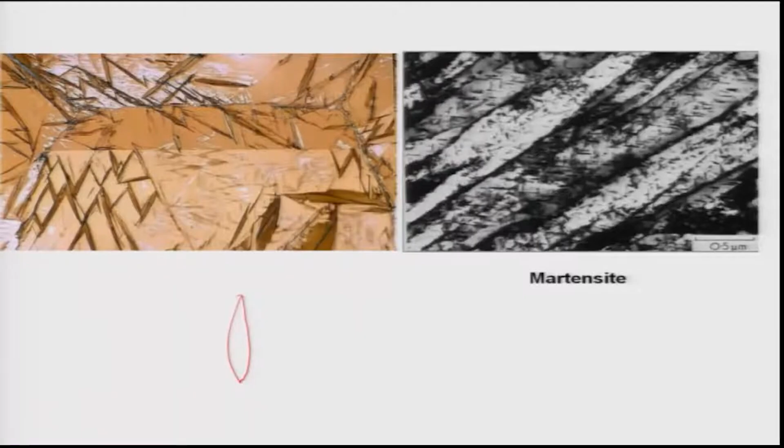That is what I have shown you earlier also, and they are faulted, and basically faults lie both inside the plates as well as on the surfaces, that is, along the plane between the austenite and the martensite. But mostly internal faults are more predominant in the microstructure. That is what I have shown you. Internal faults like twins are very predominant in the martensitic plates.

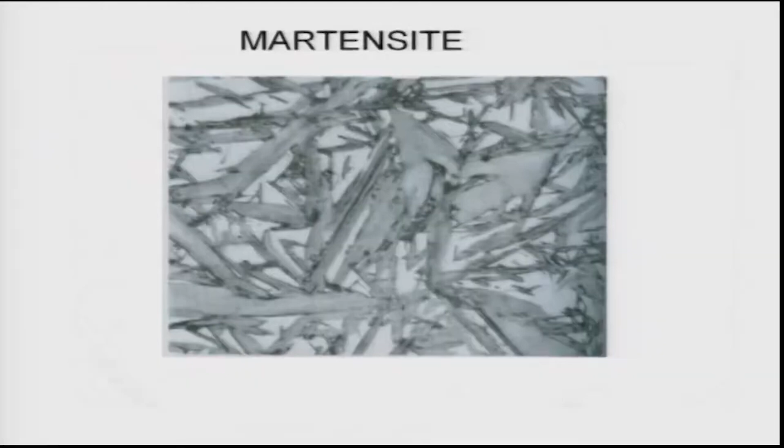Now, these things can be easily discussed using a nice analogy, and that analogy is in the book of Professor A.K. Jena and Professor M.C. Chaturvedi, and I am taking the example directly from this book. As you clearly see, before the transformation to martensite, some scratches were made on the surface, and then the steel was heated to high temperature and quenched in water.

So obviously martensitic plates will form on the surface, and this normally creates surface relief. That means the distorted plane comes out from the surface and creates a surface relief. That is what is seen there. You can see there is a distorted region along these lines. Let me just show it. Okay. So this is the distorted plane, as you see here, along these directions.

Now one can actually look at the scratch. The scratches were moving on the plane of the parent phase austenite, then they get bent on the martensitic plates, then subsequently they again remain flat on the surface. So we can represent this whole situation in a schematic manner. That is what I am showing here, like distorted plates.

MNOP is the undistorted plane of the austenite before the transformation, and EFGHIJKL is basically the distorted martensitic plate. As you clearly see, the scratches were moving on the flat MNOP surface, then they get bent along BC, and then again moved out from these distorted martensitic plates.

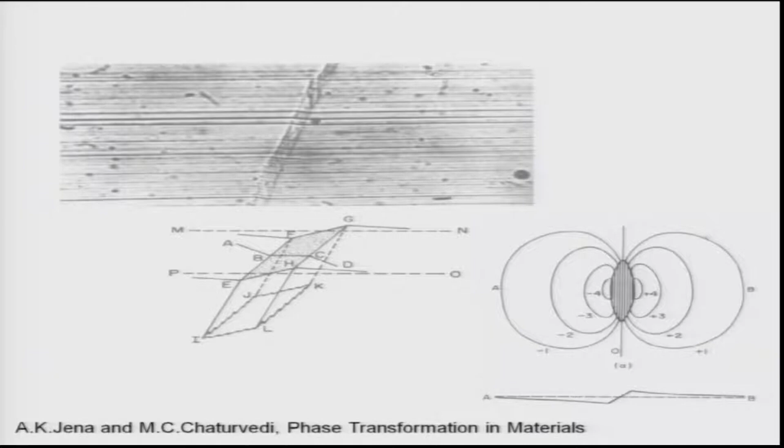So, the direction of the movement of the atoms is even seen there also. If you look at the orientation of the plane E, F, G, H, that is bent in the direction same as the distortion of the crystal. So, that always happens, that means the distorted plane remains a plane, and the distorted direction remains a direction in the parent austenite crystal as well as the martensitic crystal; they do not get changed. So, that is only possible when they keep the orientation relationship constant without distorting much.

So, what actually happens is shown in the next picture which I have shown you earlier. If I have continuous FCC austenite unit cells sitting atomically, where these open circles correspond to iron atoms and the closed black circles correspond to carbon atoms, we can actually constitute a BCT unit cell out of the two FCC unit cells, just like the way it is shown in this picture, and the one which is taken out from the construction is shown here in picture B.

You see the c/a ratio is actually close to 1.04, that is a very small distortion or very small increase of c as compared to the BCC unit cell of the corresponding alpha phase. So, these distortions which are happening can again be represented in terms of atoms. Here the open circles are iron atoms sitting on the plane, and the dotted open circles are sitting below the plane, and the carbon atoms are shown as black or closed circles.

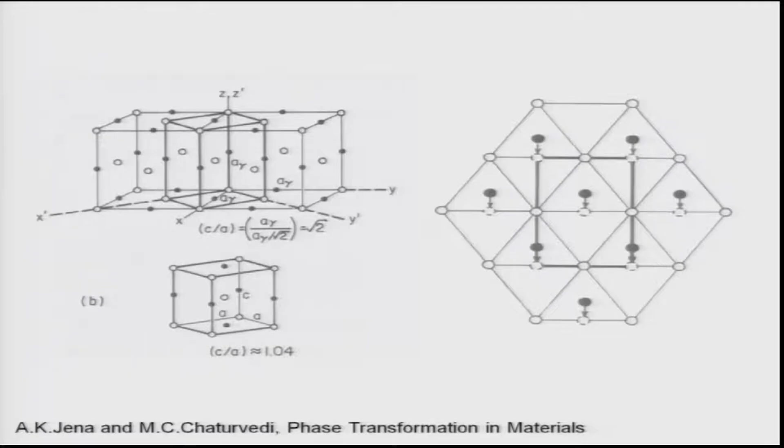As you see here, the carbon atoms actually move from these positions to these positions very easily. So the whole distortion requires vertical movement of the carbon atoms. These carbon atoms actually move vertically simply by application of the shear force in this way, and they cause the distortion in the martensitic plates. So that is basically the idea.

Now if you do this kind of distortion, you generate a lot of strain, and this strain can only be accommodated by creating twins. That also can be seen in the simple picture. Suppose I take a simple undistorted lattice, shown as A, and then start giving a shear strain. One part of the crystal has become bent with respect to the other, and if you want to create invariant planes which will remain invariant with respect to the matrix, then what is required is to give a slight distortion like that.

You see, this is a slight plastic distortion given, so atomic planes do get moved, and subsequently these planes will be arranged energetically favorably like that, and this will lead to twin formation. That is very evident in picture from C, D, E.

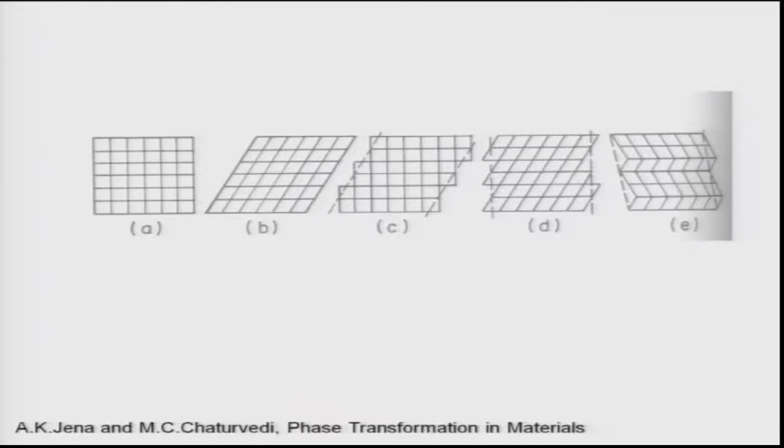So thus twins in the martensitic plates are actually because of this heavy plastic distortion which is required to keep these habit planes intact. That is why this shear process leads to twins in the martensites. I hope this is clear and evident from this picture. Details are actually there in the book chapter 10, and this will give you a much more detailed analogy of how

things are actually done. So martensites, because of the strain, are very hard as you see, and because you have a lot of plastic strain involved, they are brittle, because it has already accumulated a lot of strain. Now if you want to deform them a little bit, it will simply crack or break into pieces, and that is why martensites even in non-ferrous alloys cannot be used directly, except in nickel titanium alloys where martensitic transformation is

used for shape memory. So in most of the cases martensites need to be treated separately, because brittleness will not allow martensites to be directly used in the applications, but they are extremely hard. So that means wear resistance wise they are good, and so they can be applied for many applications.

In fact, in many auto industries they use martensitic plates where rotating or moving parts which are in relative movement to each other are present, and this mainly leads to wear and tear of the components. So therefore hardness can be used as a means to reduce the wear and improve resistance for such kind of wear and tear.

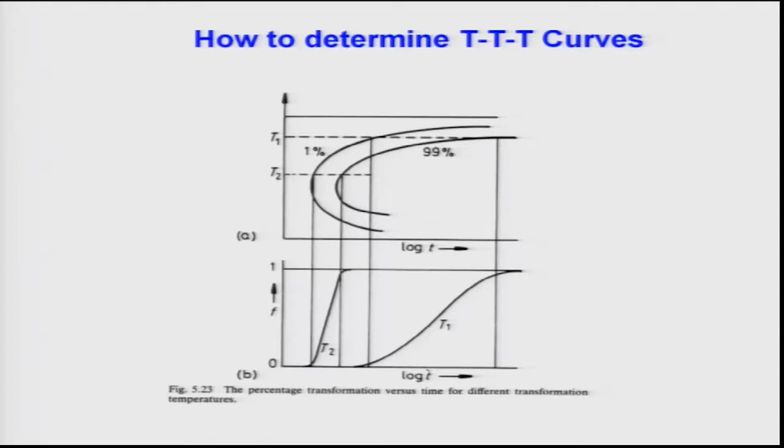The TTT curves tell you what different transformations can happen when you cool the steel differently. That is what will be shown in the next plot. So, I hope you understand. Okay, then the next curve is also to let you know how these things are done. Again, one can do it in an intelligent way.

As you see here, this is fraction transformed, what is known as x, versus time, and you can see here at time theta n and at time theta n plus delta t, we can determine the percentage transformations differently. This is again an S curve, here also an S curve. So, one can determine different percentages of transformation and then bring them there, that is possible.

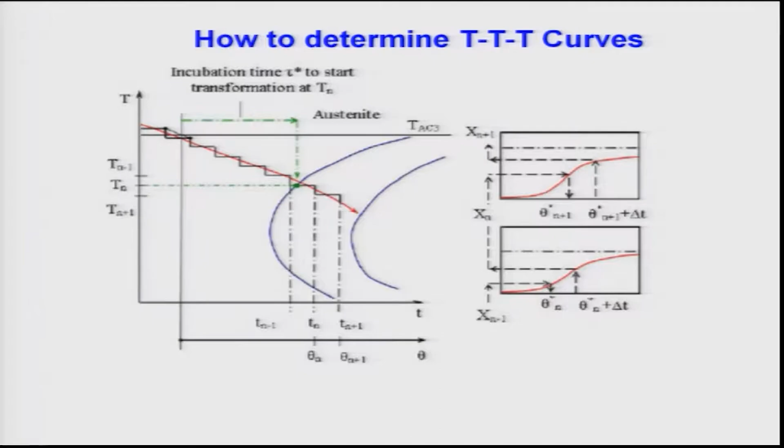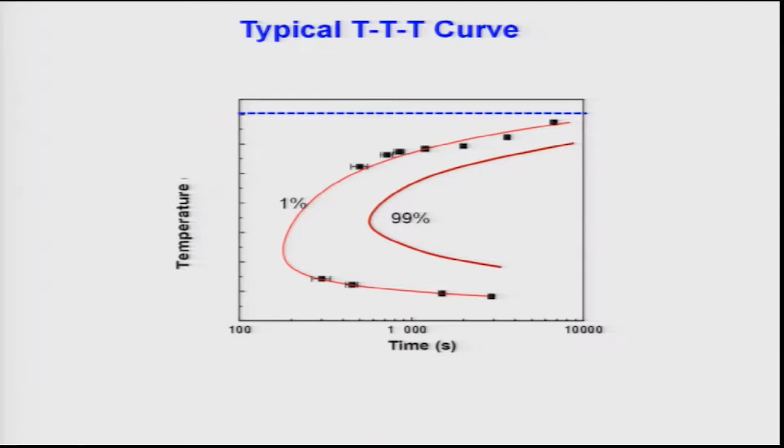So, how can we use this TTT curve? That is what is shown here, and this is one of the measured TTT curves. As you see here, above this austenite is stable, below this austenite is metastable, and these are the two curves at 1% and 99% transformation. A typical TTT curve for 1080 steel, or a eutectoid steel, is shown here. And as you see here, these are the two curves which I just showed you.

But as you know, martensite transformation does not depend on time, it is an athermal transformation, it depends on the temperature you quench to. So, if you quench from the high temperature to 200 degrees Celsius, a certain fraction of martensite will immediately form. That is, a certain fraction of the austenite will immediately transform to martensite. But if you cool it down close to 100 degrees Celsius, more austenite will be transformed to martensite. So this just depends on the temperature to which it is quenched, and if it is quenched to even 0 degrees Celsius, it will transform more.

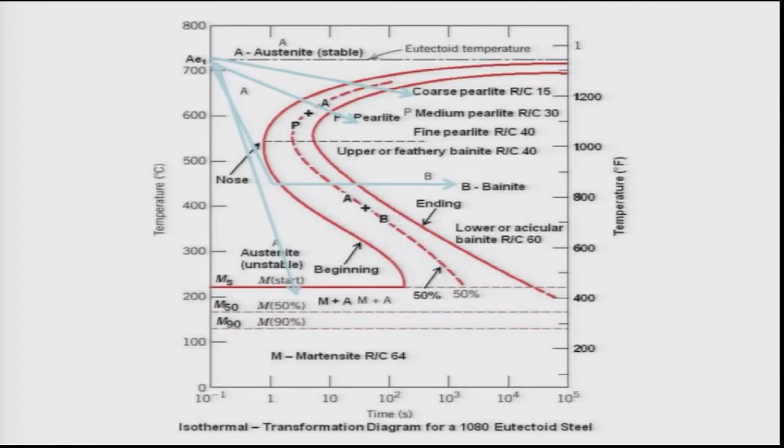Another important aspect: if you cool directly from the austenite temperature rapidly to the martensite start temperature MS, it will lead to formation of martensite. Obviously, this bypasses both the austenite to pearlite and austenite to bainite transformations, as shown in this picture. The martensite start temperature shown here marks the start of martensitic transformation, below which martensite will form. Once cooled below it, martensite forms automatically; it does not depend on time at all. In the next lecture we will discuss martensitic transformations and related issues a little more.